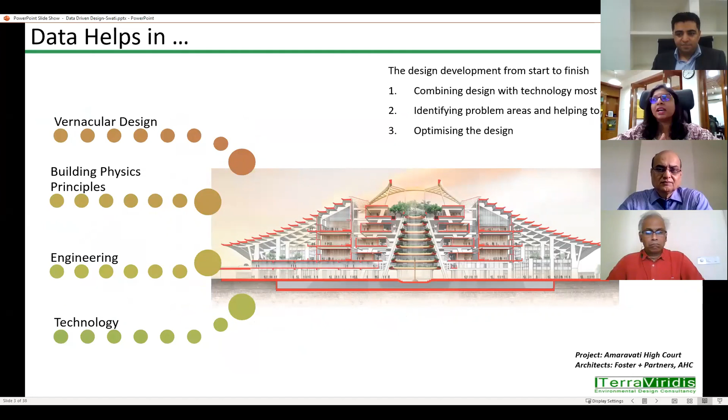Now, we all know about what data can do from an energy perspective. We know that it is about combining design with technology. It's about optimizing design. It's about solving problems. It's about setting very high performance benchmarks, ambitious targets, and reaching those targets with the help of design. But actually, in reality, only if this high performance energy design is combined with health and comfort can it actually become a sustainable design that can last a long time.

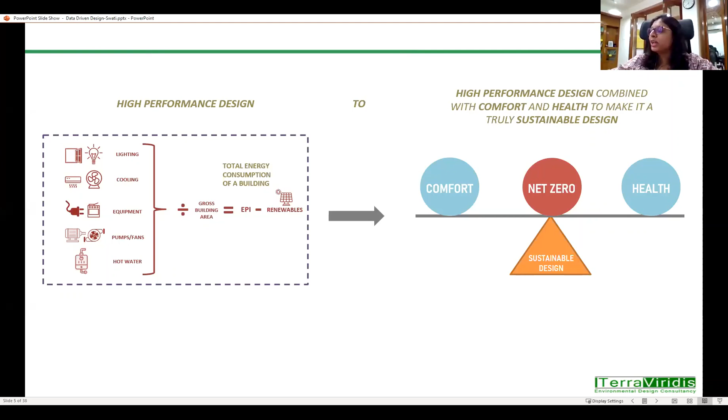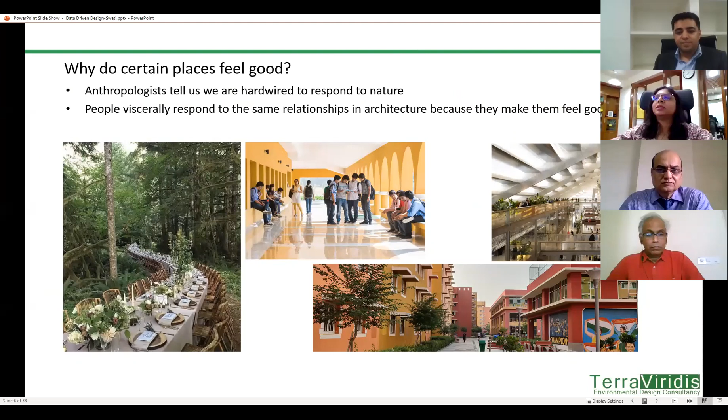So what I mean by this is, if a building is energy efficient but not, let's say, as comfortable, people will find quick ways to retrofit it in the most inefficient way. So that's why comfort and health are very, very important. Same goes with health as well. That brings us to the point of, what do you mean by health? Why do certain places feel good? Why do certain places appeal to people in general more than others?

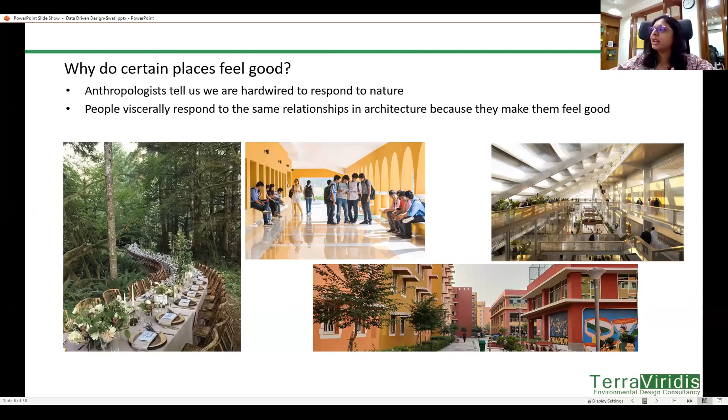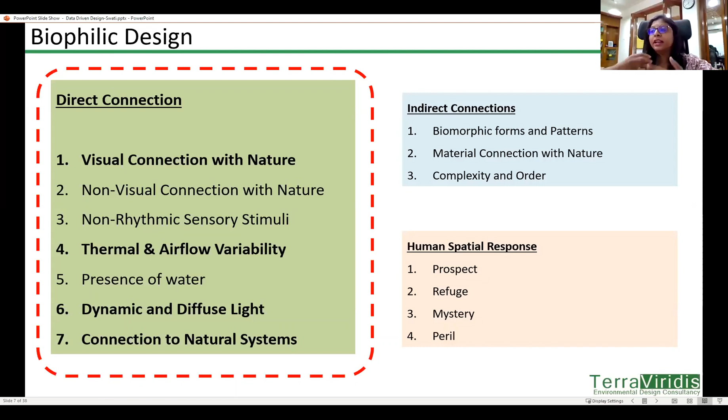It's all about how people are, I believe, hardwired. Anthropologists have given us research-based evidence to say that people are actually hardwired to respond to nature. And they respond to the same relationships in architecture as well. So architecture which relates to nature always has a better response than otherwise. And this is what biophilic design, as I had mentioned before, is based on. I won't go into details, but some extremely basic architectural interventions are visual connection, thermal variability, daylight, and connection to the natural systems.

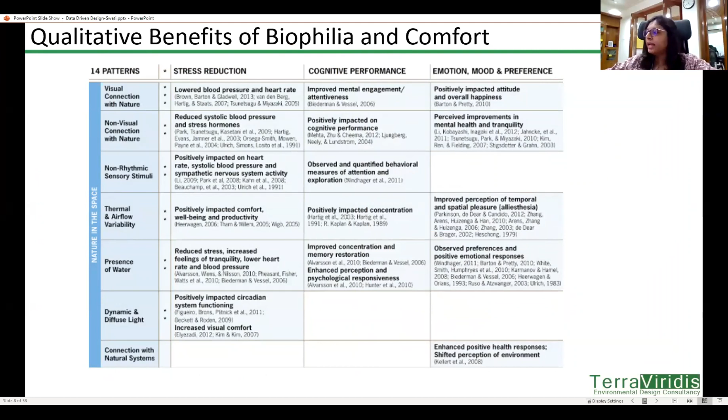argument forward. Similarly, there are also quantitative benefits to comfort that have come up through this kind of research, saying that daylighting and lighting actually help people sleep 46 minutes more per day. So this kind of quantitative data is available right now that could help builders and clients make a decision or go towards a certain direction.

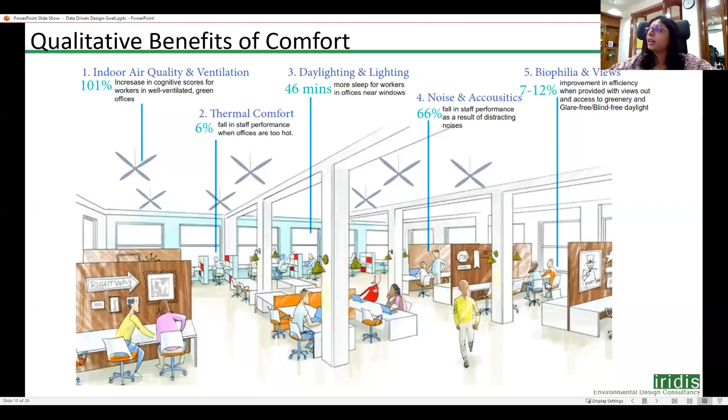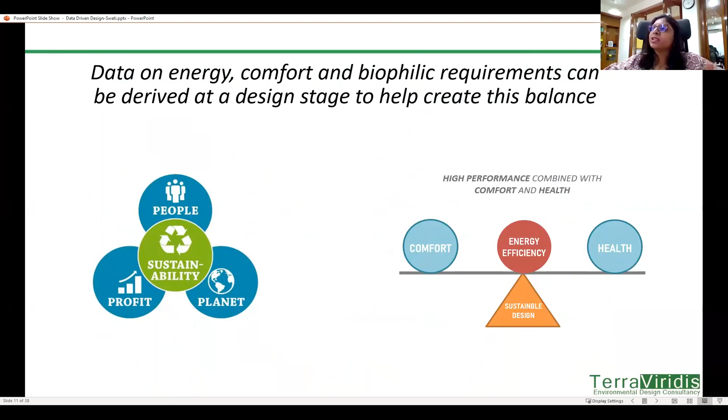So now, how can all this be brought together? How do you bring together energy efficiency, comfort, health? Are there tools available that can help you make design decisions early on during the design stage? That's what I would like to give you a very quick glimpse of. There is data available that combines energy, comfort, well-being, and principles of biophilia, that can be derived from various tools used at various stages of design. And this could form the basis for design development.

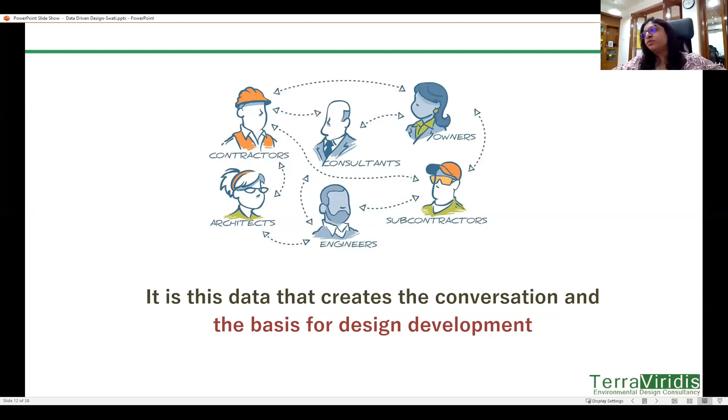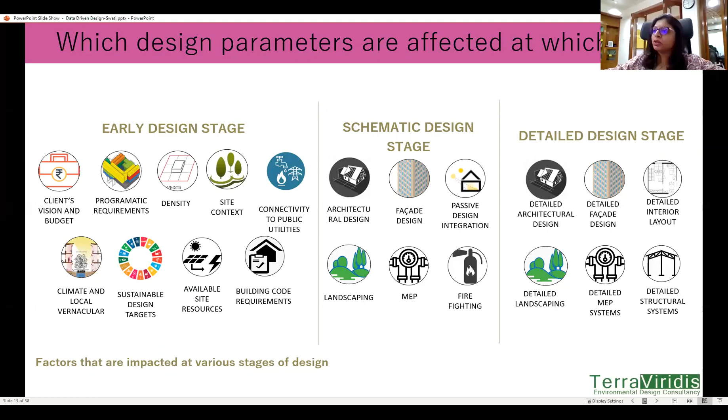So let's look at which parameters are affected at which times. At the very early design stage, you have a whole set of requirements from the client, programmatic requirements. But there is also other information available, such as climate, sustainable design targets, and the site resources available. So at every stage in design, apart from the standard set of parameters available to the architect, there is a whole set of other design data that relates to energy, comfort, and health. And what are these? There are several manual tools and calculators.

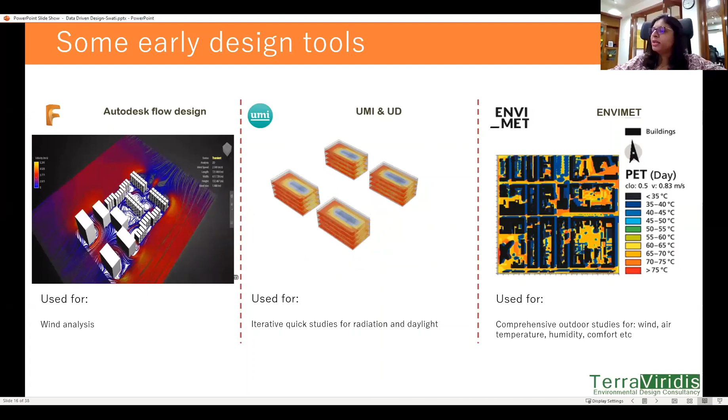There are several design tools that can be used at very early design stages, which look into climate analysis, which look into radiation, and a little later stages of design as well, which look at how to space your buildings, how deep your floor plate should be, and if you space buildings together in a master plan in a certain manner, what would be the wind flow through the site and around the buildings. So all these kinds of design tools are to arrive at this kind of information. There are several tools available that give you this kind of data.

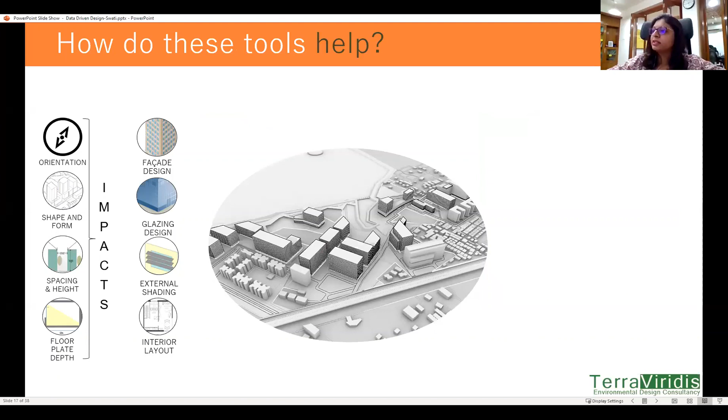Now, how do these tools help? They help you arrive at orientation, form, etc. They help you arrive at spacing and height of the buildings. They arrive at floor plate depths. They can help you arrive at facade design. They help you arrive at design glazing specifications. They can help you arrive at different types of shading that are appropriate for various types of facades. It also helps you arrive at interior layouts.

And how does this help? When you arrive at all this based on data, it can help in developing a design which has good daylight with visual comfort, a low amount of heat ingress that eventually leads to good thermal comfort, a good amount of ventilation and natural ventilation that results again in lower lighting loads and lower cooling loads and lower energy use.

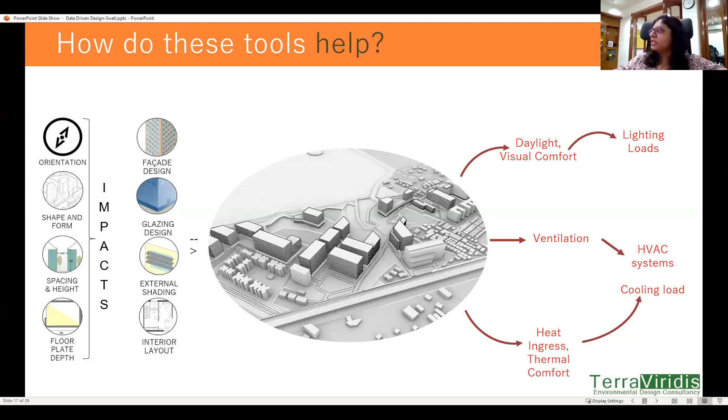So the way that one could approach design to be able to balance energy and comfort is to look at comfort first and say, if you make a building comfortable and use building design principles to make a building comfortable, and also principles of biophilia and health, if you take that into this equation, then it will automatically, in a way, lead to a very efficient design.

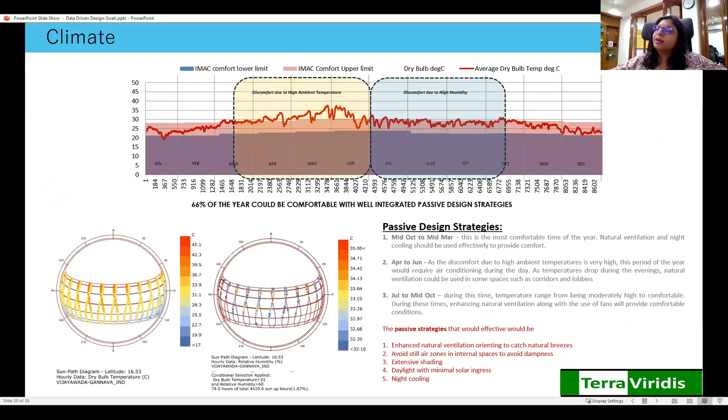So just a quick glimpse into the kind of data that can be derived. At a very early master planning level, there are several tools available. There are climate tools, solar tools, wind tools, which can help in understanding what the climate of a place is, how the climate can be taken advantage of, and the times of the year when one can have a greater connection to nature without impacting comfort in any way. There are tools that can help you understand the impact of orientation, and the balance between spacing between buildings and the height of the building, so that you do not compromise on it in any way. So there are several tools this way.

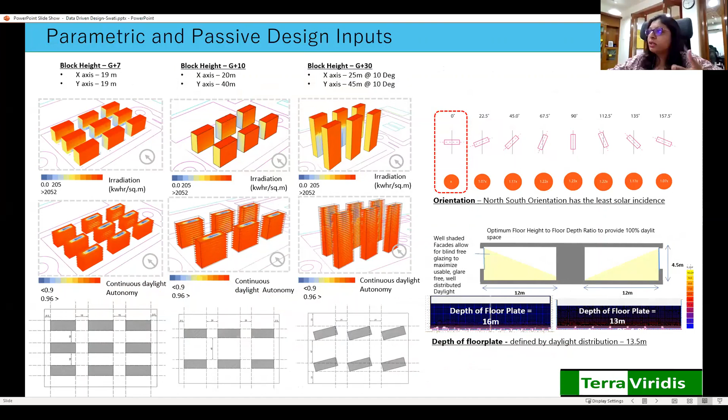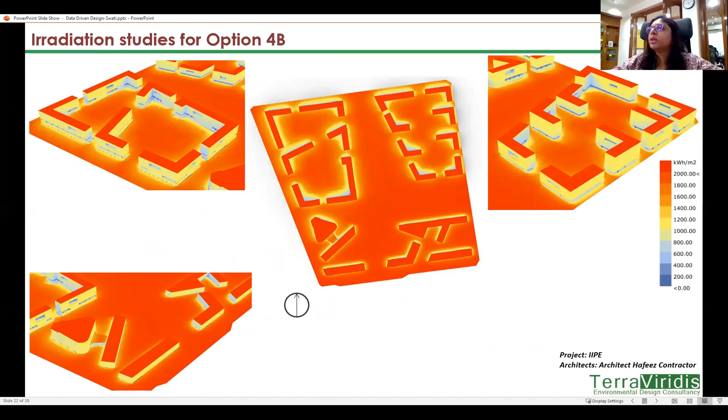And once you develop a certain form, there are again tools that can help you analyze a building based on what the solar gains are on the facades and on the whole site, how wind and sun interact with the form that you have come up with, how comfortable the external spaces are during different times of the year, and what are the various things that you can do to make those external spaces comfortable.

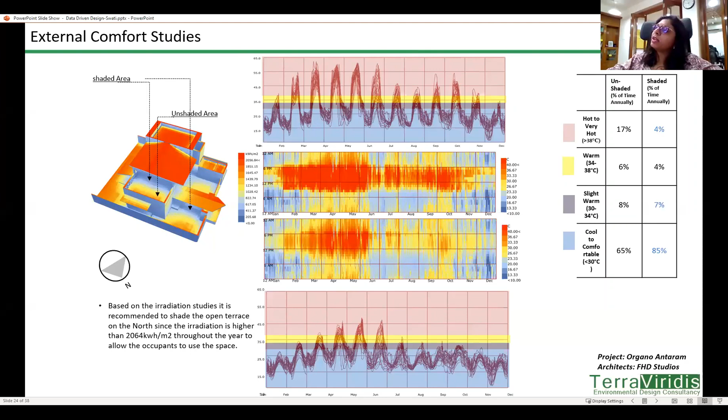Now, why are we talking about external spaces? That's because, again, we go back to the concepts of biophilia, where we're talking about the connect between the inside and the outside and connect with nature. So unless you make the external spaces comfortable, you are not actually creating a comfortable connect. So that is why design of external spaces for comfort is actually as important as design of internal spaces.

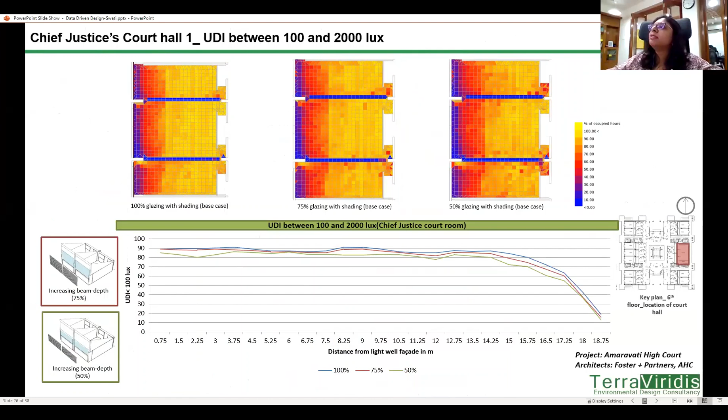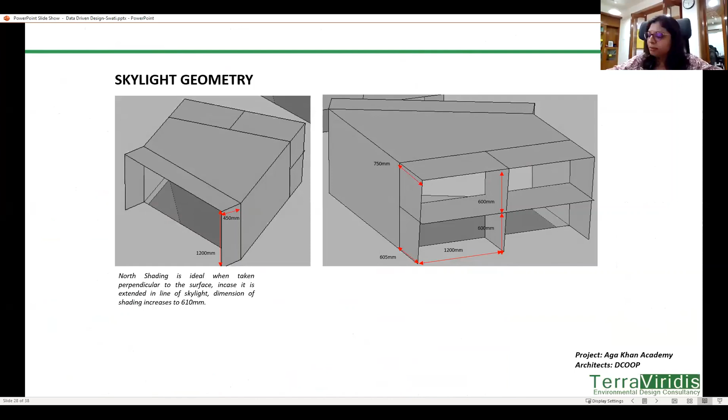Now coming to the next part, when you get into more detailed design at the building level, there are again tools available which help you balance daylight and glare. There are tools that can help you balance the impact of various facade elements and skylight elements on your visual comfort. There are tools that can help you understand the performance of your envelope, not just in relation to energy, but actually in relation to how comfortable you are within the space. These things relate both to conditioned and unconditioned spaces. Conditioning doesn't always result in comfort.

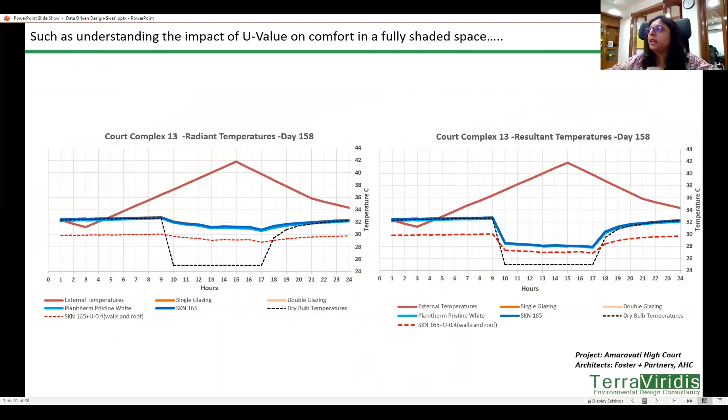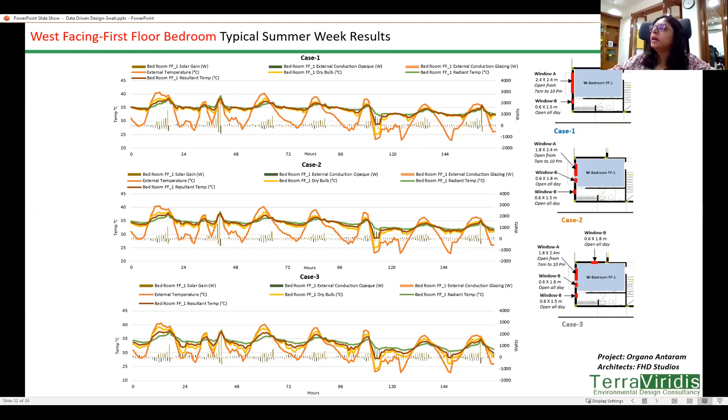And there are also tools available where, for the same type of walls which have similar thermal performance, you can see how comfort varies for different wall typologies, just based on how they are constructed. They might end up with the same energy result, but comfort might vary quite a bit. So these are some of the data points that can be picked up during various stages of design that can help balance energy, comfort, health and biophilia.

And of course, when you're looking at a combination of conditioned and unconditioned spaces, there are again several tools that help you, that will give you the data to understand which of your design methodologies are working how well against another. So all this, however, requires an integrated approach to be able to use this data and convert it into a design language, understand how this data can be integrated into a design to make the right impact.

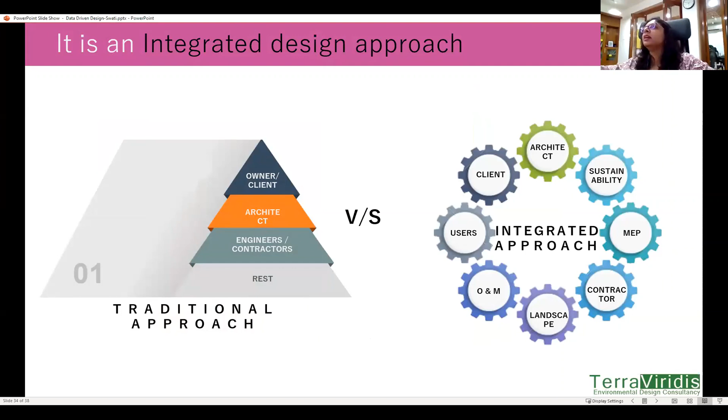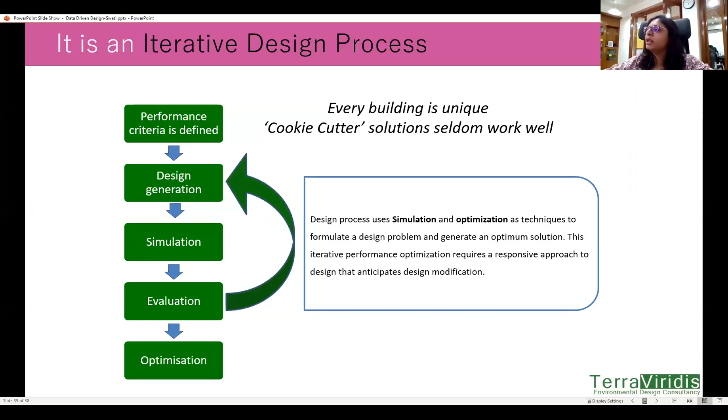All requires an integrated approach. It also requires an iterative approach. There is no cookie cutter solution. Every building is unique, and we will have to do this kind of study for probably every building to be able to get it right. What has it resulted in? It has resulted in fairly good results, both in terms of energy.

This particular campus that we are talking about has the largest net zero energy building in the world as of now, as of today, 3.5 lakh square feet of net zero energy building, with 100% of the energy being generated on the rooftop and on the roof of the car park next to it. And it has used much less water, and other parameters fall into play.

What this particular campus also brings about is unobstructed views out, which means that the need for blinds is zero. You don't need any blinds. So the envelope and the floor plate have been designed in such a way that you can use daylight and have unobstructed views out throughout the day from any orientation of the building. This is what biophilia is, and this is what connecting your inside to the outside means, I would believe.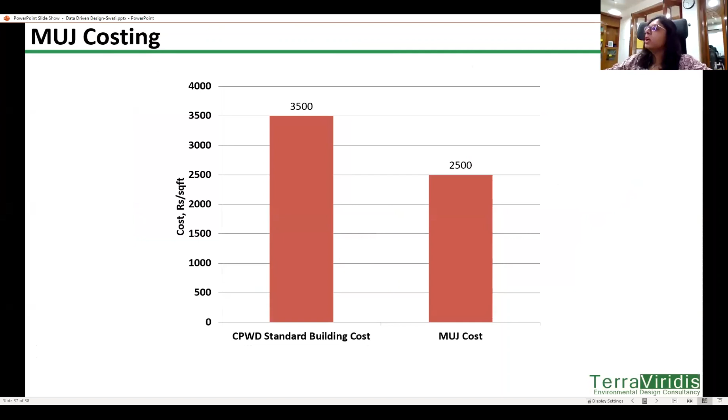And all this comes down to cost. And this is one place where cost has not been greater to do all this. We didn't have to spend a lot more than a standard building. In fact, it was a little less as well. And this is how it came about.

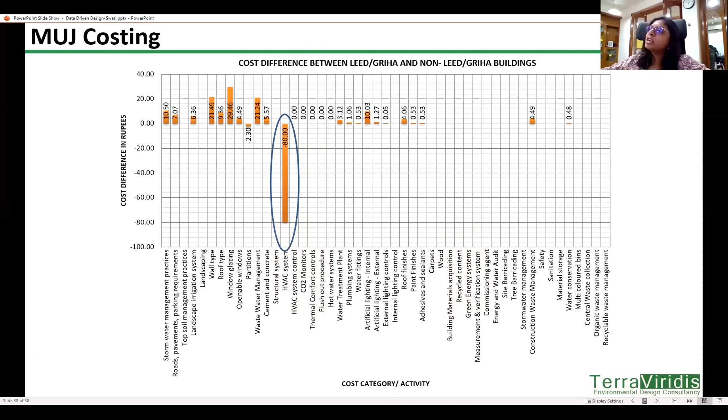When you start spending some money extra on, let's say, the envelope of the building, there is offsetting and optimization possible in your cooling loads. There is optimization possible in your systems. So this is how cost can be balanced. So energy can be balanced with cost and comfort. So that's me, and I'm going to end it here, saying that data has a large part to play in helping arrive at a design that balances energy, comfort, cost, and principles of biophilic design.

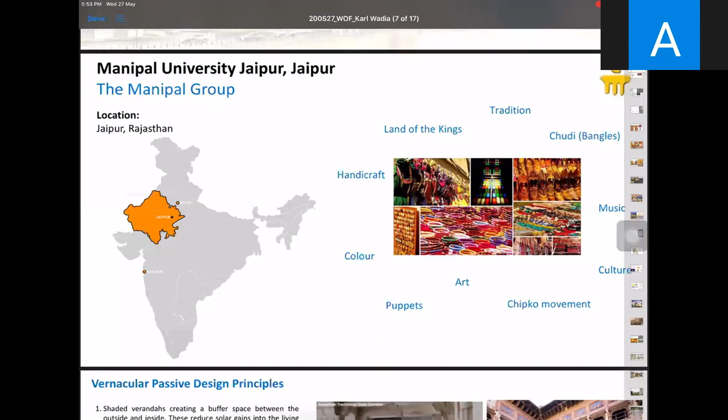So Jaipur, as you know, is the land of the kings, a lot of color, art, also an extremely hot and arid climate. So the first thing we did is we started looking at vernacular architecture, why this vernacular architecture has thrived over the years, and we had to design a student settlement of nearly 12 to 15,000 students in a plot of land given to us, which is about I think 55 to 60 acres.

So the first thing that we started to do was look at these medieval towns and how buildings are huddled together to create extremely intimate spaces, and using the bylaws of the city, and one of the directions given to us by Swati, who was our sustainability consultant for the project, was to bring the buildings as close together as possible, to orient them north and south, to shade the east-west axes.

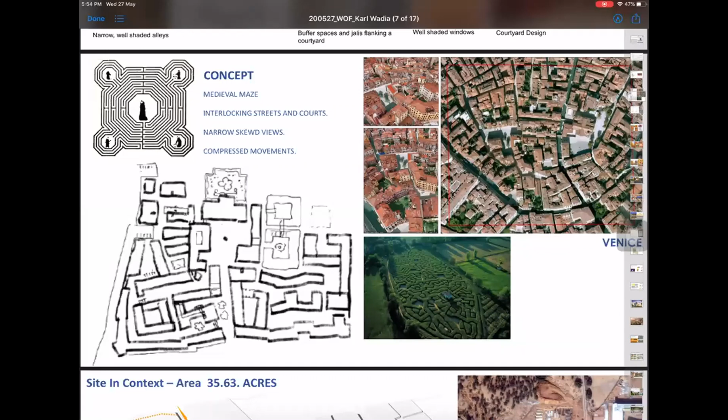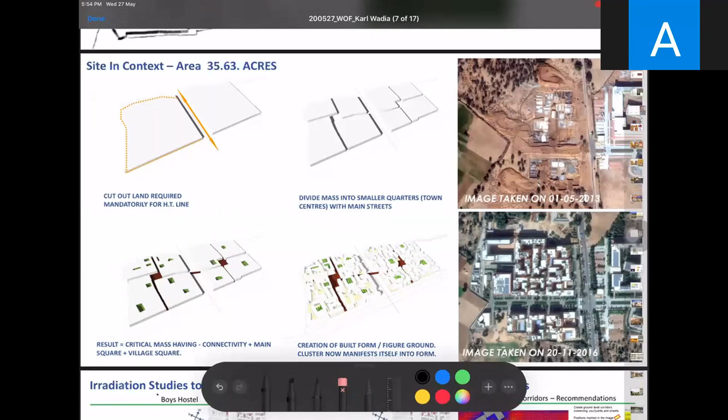And with that, we developed this concept where we were able to actually not use the entire 55 acres, but do what we needed to do within 35 acres. So what you can see on the left-hand side is some diagrammatic concepts we showed the client, where the final solution was to create these two medieval villages.

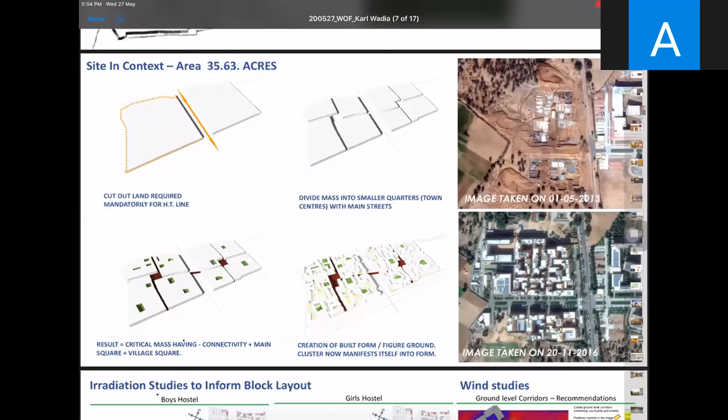On the left, we had to segregate the boys from the girls, so with these town center squares in each of these villages. And what you can see on the right hand side is, when we started the project, we started actually in December 2012, the design. You can see we've hit plinth by 1st of May 2013, and by November 16, we had developed the entire student campus of nearly 10,000 students with supporting infrastructure like food courts and sports facilities, and all of that in a completely zero energy campus.

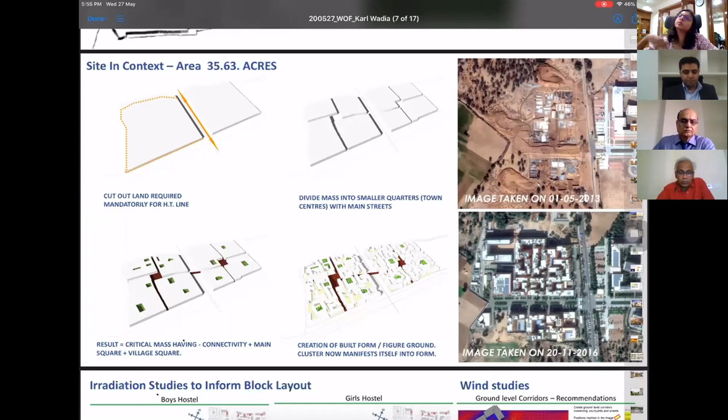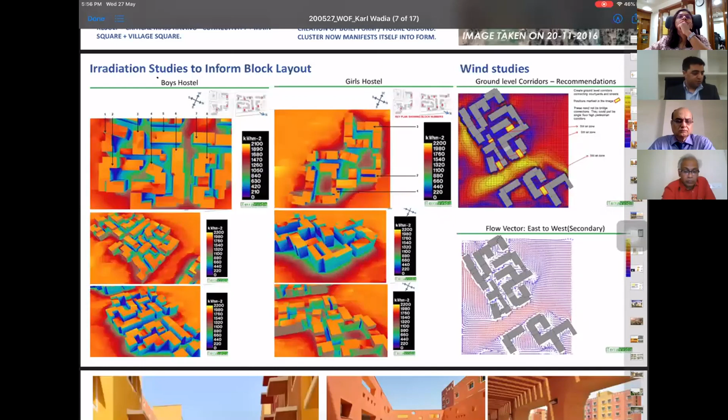Now, some of the data used while designing these buildings: you can see on the left hand side and in the middle, these are all the irradiation studies that we did with Swati's office. On the bottom right, you can see the wind studies that were done. Each of these courtyards, each of these spaces was actually studied. Buildings were twisted and turned to get the perfect result. And the campus, which is actually built, this is what the spaces look like.

Whether it's an east facade or a west facade, or a north or a south, every facade has a different chhajja dimension based on the analysis done. We had extremely low budgets, so everything that you see is actually painted on the buildings. There is no ornamentation whatsoever. All of these windows are all painted using the sort of colors of Jaipur and Rajasthan.

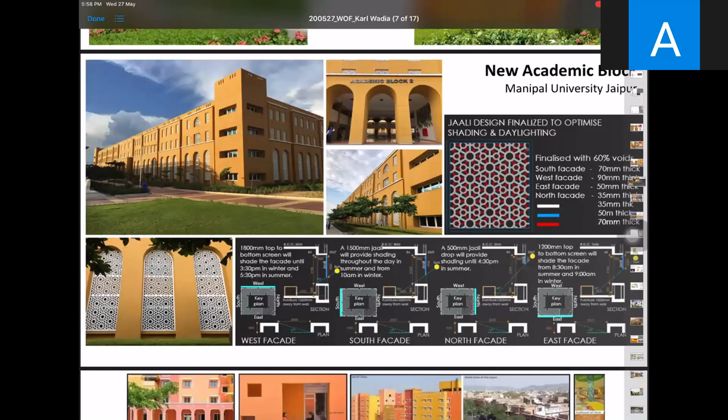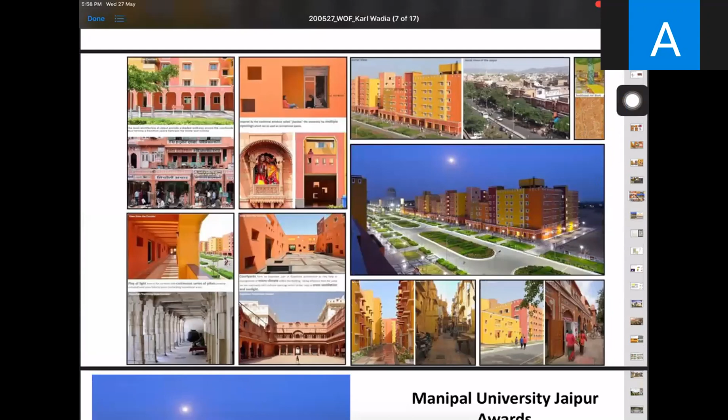Because this building was built on the opposite side of the campus where there was a pre-existing architectural style, we had to retain that. But all of this information was brought into the elevation to inform the design in a way so that you had classrooms which could be operated throughout the day without ever rolling a blind down, which was a fantastic achievement. So this is the look and feel of the whole Manipal campus, and we've been lucky. We've won a lot of awards, 5-star GRIHA rating, and many awards for this campus.

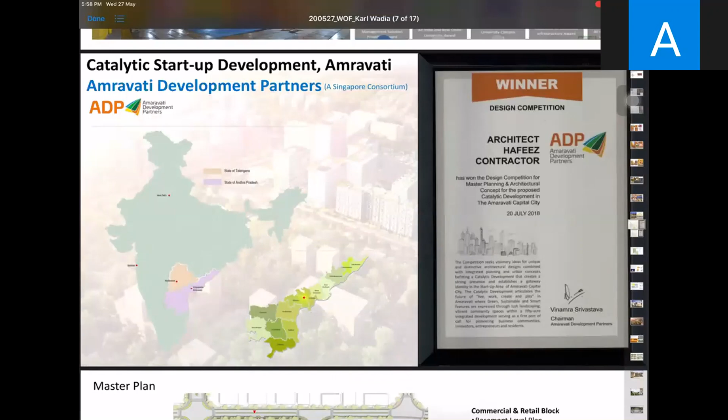The next project I'm going to quickly move through is a design competition we did for the ADP group in Amravati. We were fortunate to be the winners of that competition. Unfortunate that that project is no longer happening. It's a big mixed-use project with residential, office, a hotel, and a huge park which had to be activated. This site was almost touching the government complex which was under construction, and this was aimed to be the very first business district or business project in the city of Amravati. So there were very, very big aspirations.

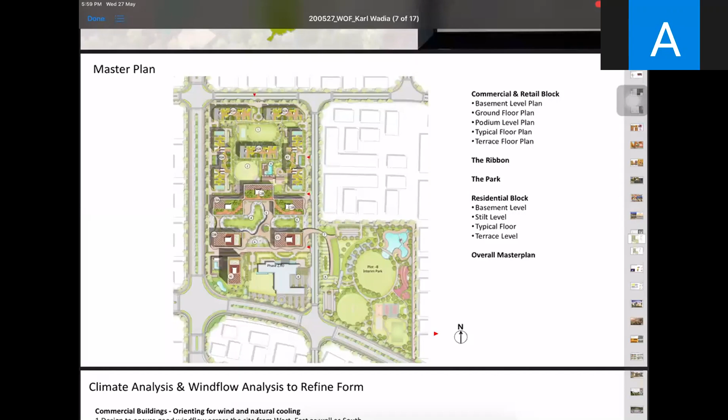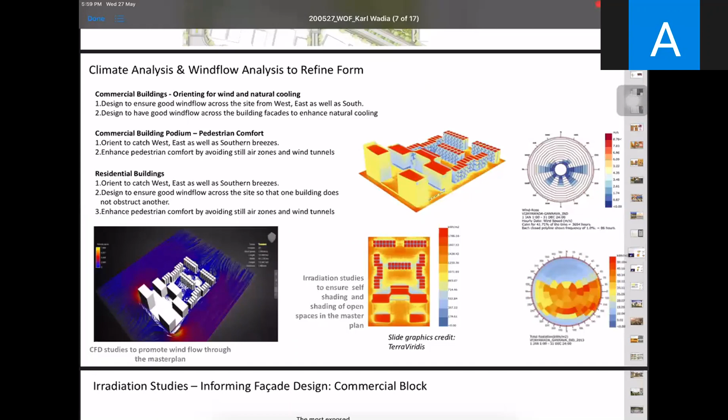So what you see here is we picked up one example. This is one building, and you can see on the right hand side, the south, east, north and west facades are all being heated differently, and since they are having a different sort of heat gain, the solution for each of the 4 facades had to be different.

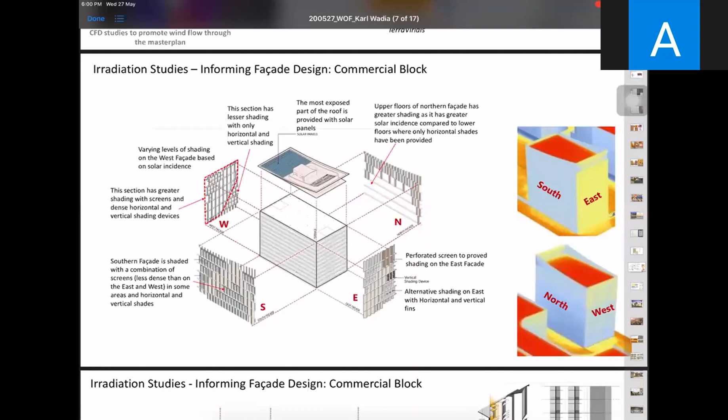There could not be one single elevation that just wrapped around the building. So you can see the north facade, for example, almost has no louvers or no fins whatsoever. And the other facade that we felt we needed to deal with was the terrace of the building. So that again had its own design solution with an amphitheater and all of that.

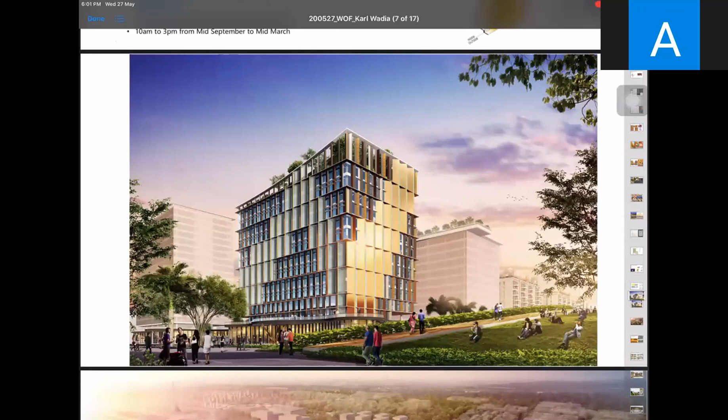So even though we put louvers, we made sure that the louvers blocked the west and the east sun. We made sure that the natural ventilation was brought in from them, so that you had cooler breezes. And this is the final elevation of the building. What you're looking at is the west and the south facade. This is the overall complex and how it works overall.

And the last project that I'm going to show you is what we did in BITS Pilani, Rajasthan. So here the challenges were completely different. This falls in district Churu, which is actually the hottest place in India. Just 3 days ago on May 25th, Churu had a temperature of 47.5 degrees. And in the winters, the average is about 10, but typically around January 15th, it hits 0 or sometimes even

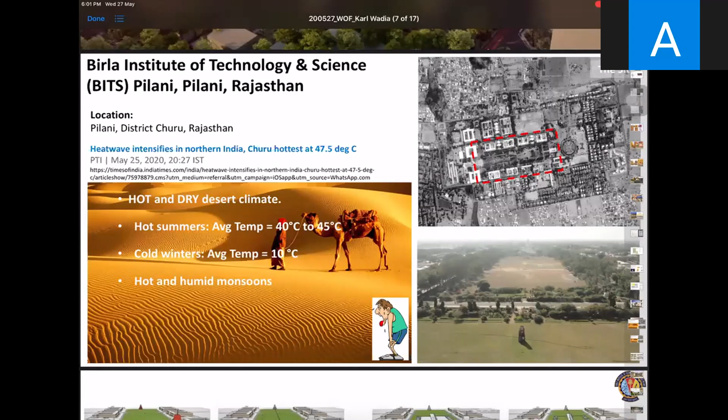-1. The challenge in this site was we had to create an academic building for 3,000 students sitting in a very old heritage campus. And sorry. And you can see on this slide, you have this grand old clock tower, you have a Saraswati temple, and the site was right in the middle. And we had to use all of this land to create this campus, but also keep it thermally comfortable.

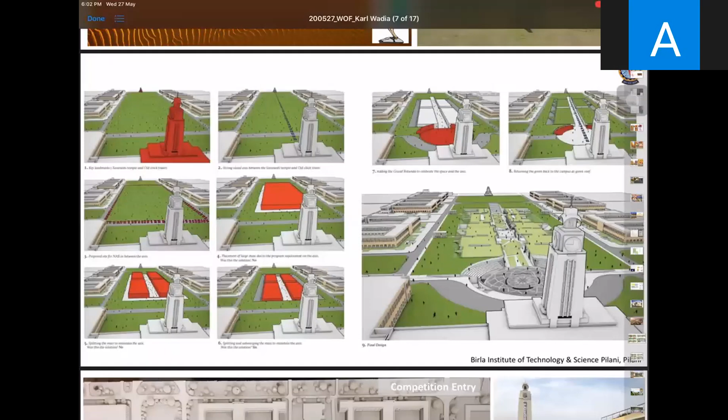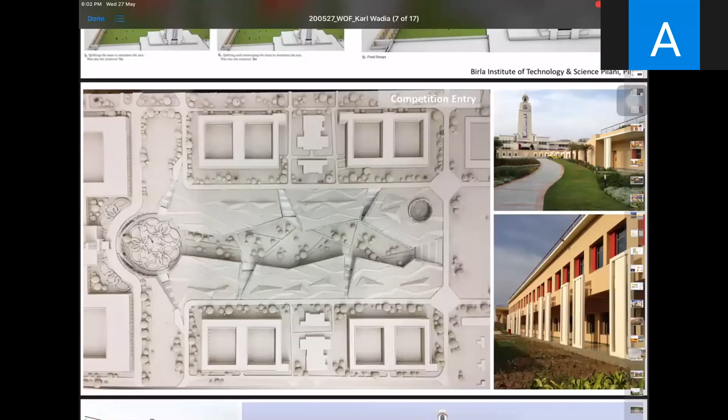So what we did is this was our design, sorry. This was our competition entry. We made a model where we kept all of the old heritage buildings intact, and we actually submerged, or we made the entire campus subterranean. So the objective was to create this building with no architecture whatsoever. So this was the no architecture solution.

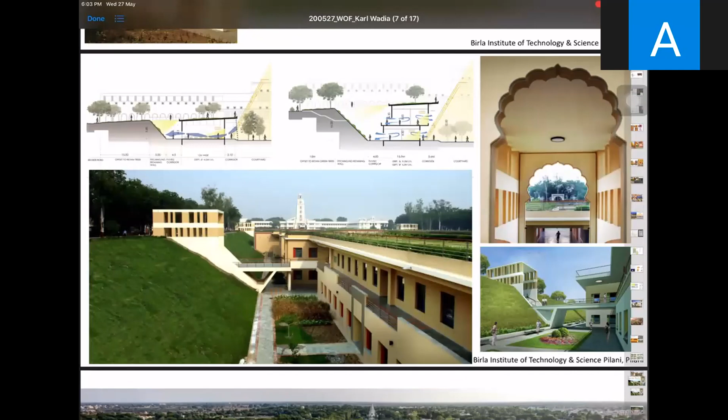Today, if you look upon this campus, you can see that the whole building is below ground. From the street level, you see no building at all. Only when you enter the campus from the street level, you can see the image on the bottom left going down. You have these portals with Rajasthani arches that lead you down. And this final image is of what the campus looks like today. This is a real photograph of a 2.5 lakh square feet subterranean building.

That's all from me. Thanks. Thanks, Karl, for taking us through your wonderful works integrated with data. Thanks a lot. We would now go to Mr. Vishwanathan, our third expert on the panel. He has a short presentation for us. This is the last set of presentations. After that, we move on to a very quick, short panel discussion.

Thank you so much. That was wonderful, Karl and Swati. My screen is visible, I hope. Yeah. Yes, it's visible. All right.

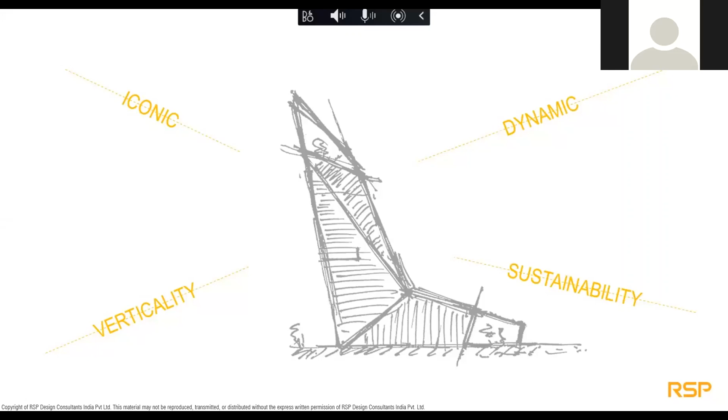So I'll take you through a corporate campus that RSP is currently working on in Noida. And clearly, one of the basic challenges that we had is balancing the whole iconicity, the place, the form, the shape, the function, efficiencies of floor plates, as well as very, very strong goals that were set for sustainability and energy consumption for this campus. Very large project spread over 25 acres with very high FAR, almost FAR of 3, that leads to a very dense mass of buildings that we needed to create.

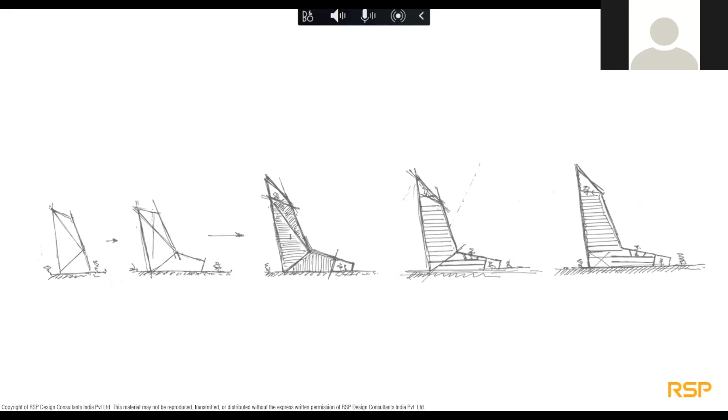So, some of the first initial sketches obviously were more form-based. The client and the brief was very clear that this must be the most iconic building that's been done in NCR. And therefore, the starting point really was from these sketches that we did, and then worked out very efficient central core office spaces with adequate depth of about 11 meters that bring in adequate daylight right to the central part of the core.

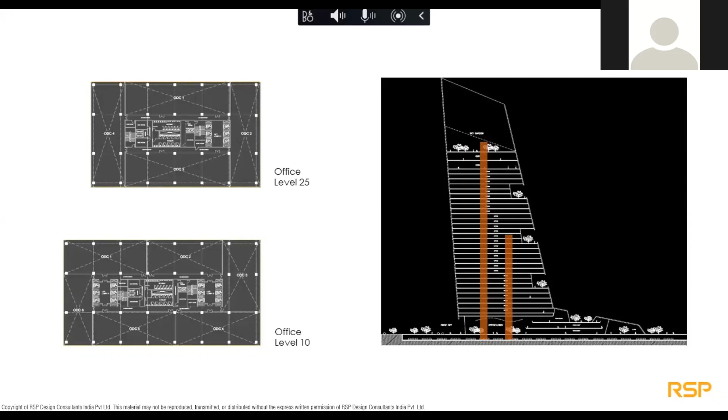And then also look at how the roof of the building, as well as various levels in this project, can be used for collaborative spaces and other kinds of spaces that address biophilia by creating gardens and terraces at various levels. From a site perspective, like I said, we had about 27 acres with 3+ FAR.

So we really had an FAR close to about 4 million square feet that we needed to consume. And the mandate was very clear that we're going to do that. The way the site was planned is where immediately our response to the climate and the location started to kick in. So the north-south direction as the longer direction then became a very critical element of how we set the master plan and how each of these buildings talk to each other, and then set the whole landscape and the scheme within that parameter.

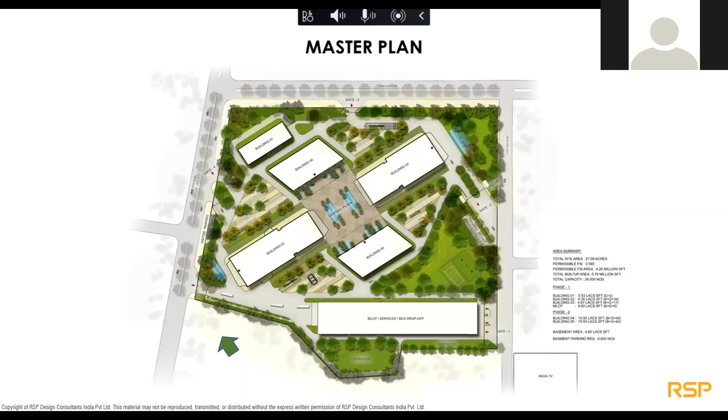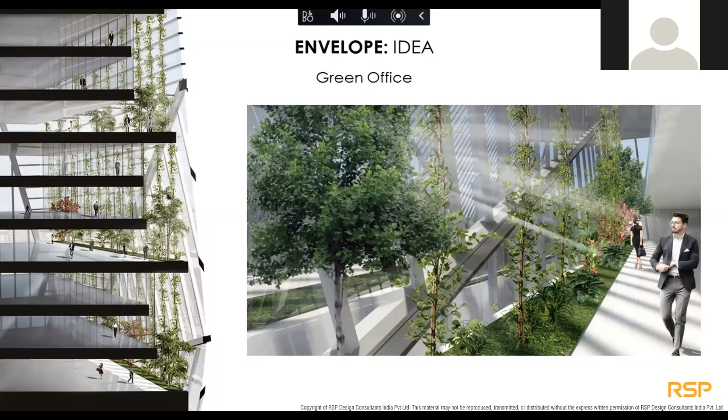Green office was something that was definitely in the brief, and because it's an end user driven building, the consultant, in this case EDS, who I'd like to give credit for working with us on that, generated numerous data points for us that we could then use towards the design of this building.

So once we looked at the form, and it is obviously a design that started with the form, but had various elements of data that was given to us from an energy performance that then formed and shaped the whole building. So while there was a certain sense of preconceived idea of what we wanted to do with the project, there was absolutely no preconceived idea of how we wanted to evolve the facade.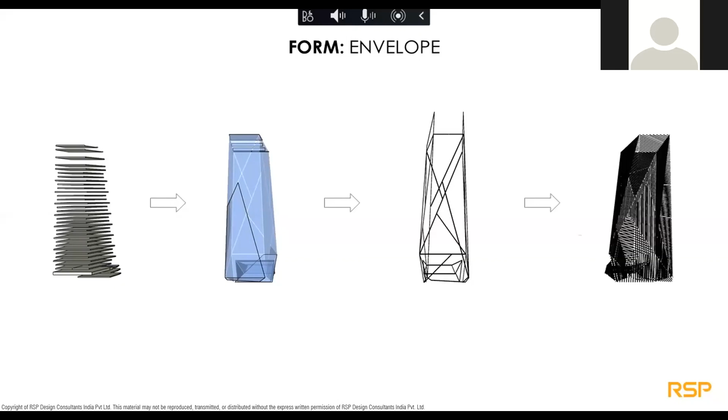The facade is organic in the sense of it developed from all the inputs that EDS, our consultant, started to give in, and then we adjusted the plans and we adjusted the whole form and shape to match those numbers. So different sides of the building then began to take shape. The floor plate itself is actually quite simple, rectangular floor plates, but then begin to reduce as they go up and then morph themselves into these facade forms that go in and out in triangular planes in this building. This is about a 200 meters tall building, if I may just set the scale.

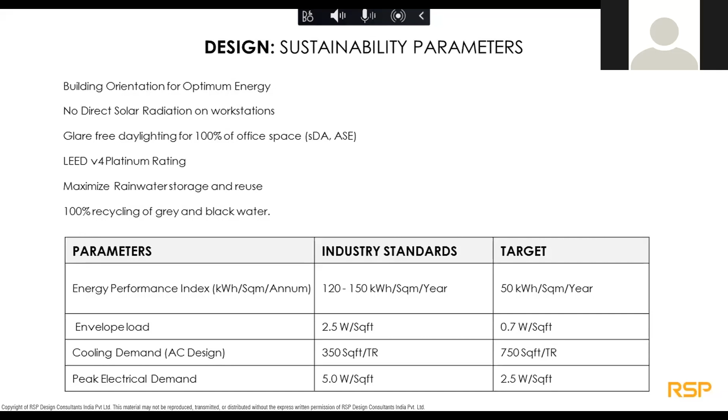But right at the outset, the client did set very, very stringent targets for us. The project goals had some of the lowest targets for the energy performance index. And coming in Noida, that was obviously going to be one of our biggest challenges to get to that 50 kilowatt hours per square metre per year. And they already had targets for us from the envelope load, from the cooling demand and the peak electrical demand. And then all the data that was generated by our consultant was then used towards getting to this. The building is obviously LEED Platinum rated, and that was a given mandate for us in this particular case.

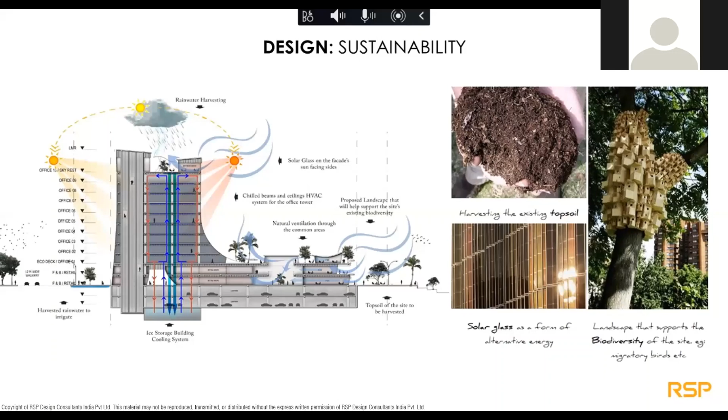So we summarized all that we're going to target from a data point of view. We did want to look at facade. We wanted to look at the selection of the materials for the facade. We wanted to look at how natural ventilation can be brought into this building. We wanted to do ice storage cooling. We were also looking at radiant cooling as different MEP systems were explored in the project. Looking at the soil, rainwater harvesting, and also creating this idea that you preserve the biodiversity by creating spaces for birds and plants to nurture within this overall master plan. The solar glass, which would generate electricity, is also part and parcel of this whole thought process.

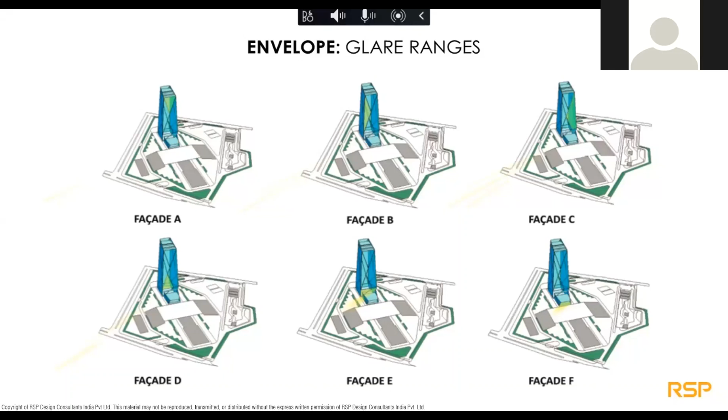So as a starting point, why the angles, why the shapes? Part of the reason is really looking at studies that we did from a glare perspective, from the visual glare or the sky glare that would come into these offices, and then look at how we can shape and organically morph this building so that some of these glare elements are cut off from the insides of the building. And then an overall idea of how this all turned up.

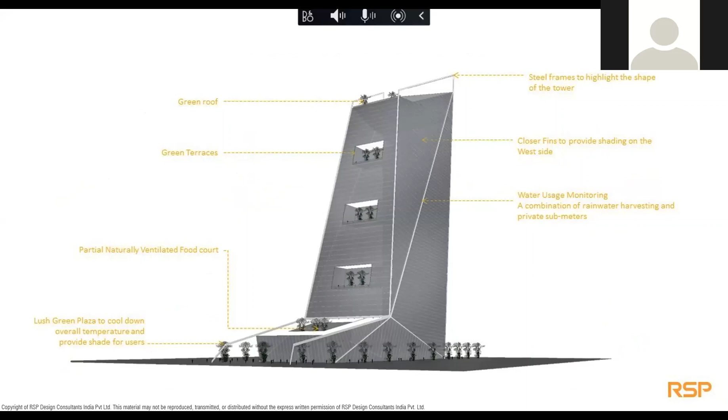Obviously, some parts of the facades were on the west. What we did was we punctured the building into it. We created that buffer of green at every alternate level to take the actual usable facade deep inside, while the front, which faces the west, has greens. We have a naturally ventilated food court at the base of the building, and then morphing the shape at different locations and playing with the facade to create the best orientation for the building.

A quick look at two studies. There's obviously a lot more detail; I've tried to compress this in about 8 or 10 slides for the paucity of time. But you can see that, pretty much the way Carl was showing in his presentation, every part of the facade was looked at, and then the angle at which it needs to incline to ensure that there is less glare as well as less thermal heat input into the building.

That was studied. And then once we had the form, once we had the basic surfaces, we went into shading devices and other shading elements. So as you go down the presentation, you will see that each of these facades takes a different shape, a different form and a different shading strategy simply because of their orientation. On the right, you see all these studies of angles and shapes and how these were input into some of the software that Swati was talking about earlier to generate results that would then determine how big a shading we need, how big a fin we need.

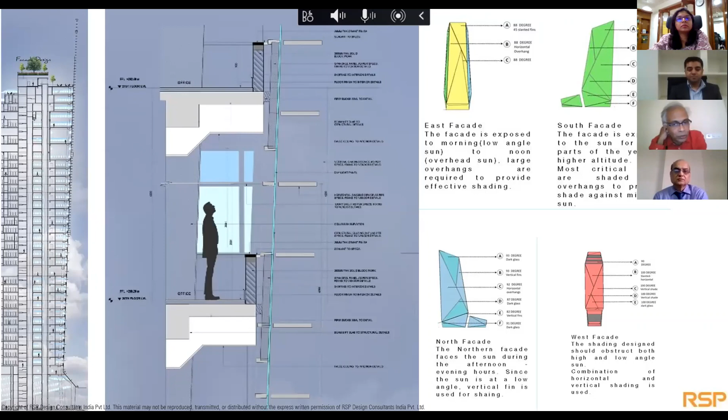From an actual facade point of view, we did use the idea of a light shelf, which is that piece of glass and that shelf here, which would bring the light inside in a reflective and diffused manner. We did have to use a lot of those fins, and they have different angles and shapes based on the surface and the orientation where they occur. While the whole building is in glass, the amount of daylight is also controlled by what is spandrel and what is vision in this project.

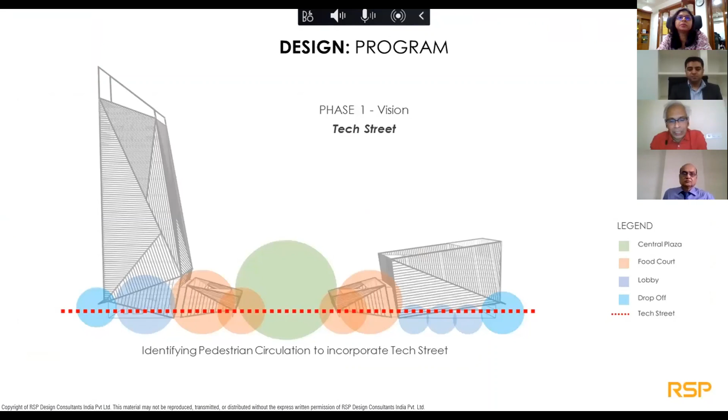From a design vision, we looked at what the ground level pedestrian activity would be, and we wanted to incorporate all the different elements as a continuous space making with the tower in the background. So this building has a courtyard in the middle. This is, of course, the high-rise building with a garden at the top. There's a food court at the base of the building, which is naturally ventilated through this terrace at the top.

At the same time, the central plaza has one basement, and a larger part of the site is devoid of basement. One of the things we've observed is basements kill trees, because you always fight over the soil depth that's available to you. So the multi-level car park actually begins to balance some part of it, and you're able to get more natural fast-growing or high-growing trees within this campus.

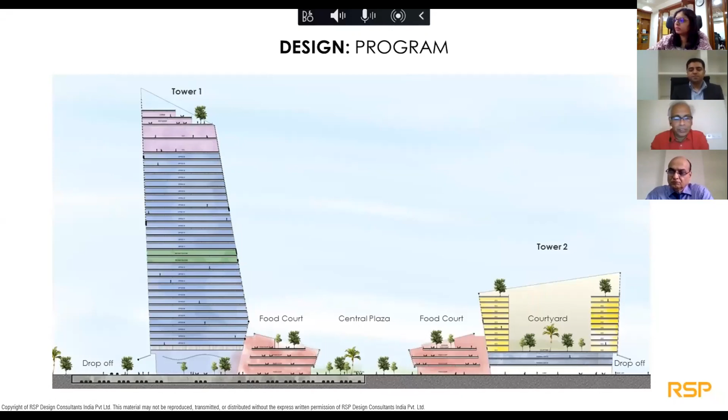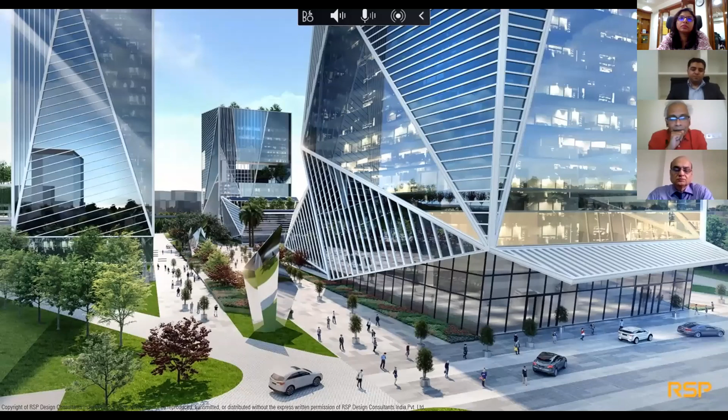A quick snapshot of how we finally conceived the building. If you look very closely, each angle has a different type of fins, and that's really to do with the orientation. Some of them are at angles, some are horizontal, some are thicker, and some do not have fins, depending on which orientation they face in the project. A closer view of the base itself, where each of these is now clearly visible.

The glass selection, of course, is based on EDS's recommendation for thermal performance, getting the right U value and the right shading coefficient. So it's a dark glass, but it still affords fairly good light transmission for people inside to have a view outside.

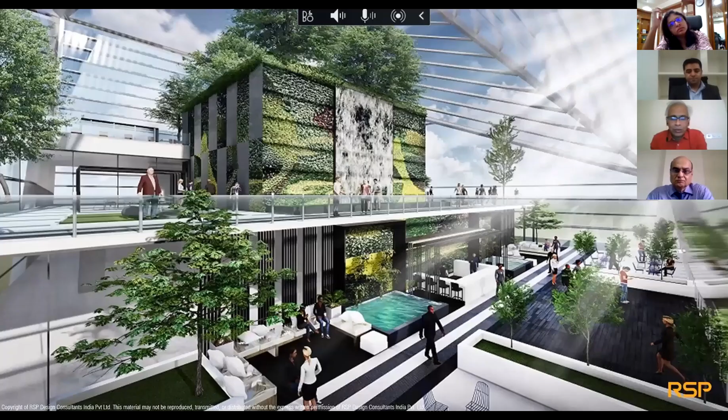Okay, and then as we enter towards the lobby, we begin to bring in elements of biophilia. There are gardens, not just at the base level, also at the roof, vertical gardens, protected. I know how difficult it is to grow some of these gardens in the Delhi environment, but once they are a little protected with these shading devices, they do much better.

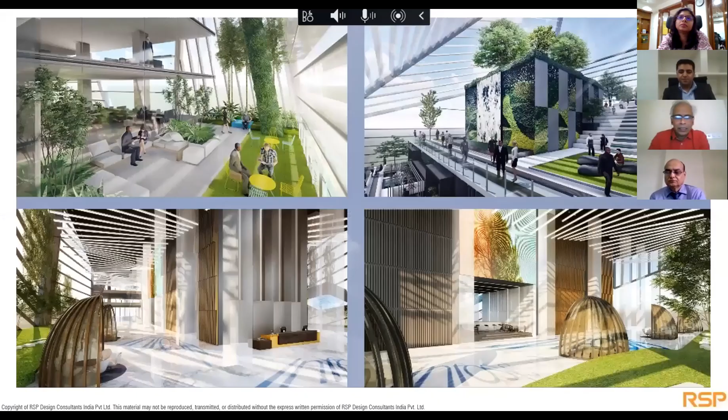And then, as I spoke about, both for thermal reasons as well as health and mental well-being, these terraces or gardens on the west face at every alternate level bring in some quality, bring in some nature, even though you may be in a 60-story or a 50-story building.

And then that then percolates not just into these terraces at the alternate levels of the west face, but also on the roof as well as in the lobby at the base. And that's the overall view.